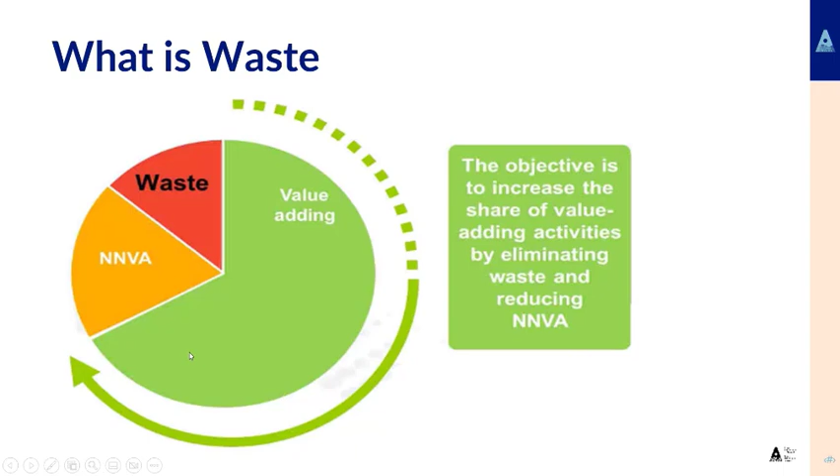So this non-value added, if it's excess checking and things like that, you can look at reducing that. And ideally, the philosophy here is to eliminate waste out of the process. But that's the philosophy, seeking perfection from lean. Reality is something different, but you're looking to minimize, reduce or eliminate it altogether, and reduce this by creating and maximizing value added activities.

So the acronym TIM WOODS basically takes waste and divides it into 8 categories. Anything that doesn't add value or is classified as non-value added activity is classified as a waste. And that waste can fit into 8 categories: transportation, inventory, motion, waiting, overproduction, overprocessing, defects, and skill under usage. Each one of these wastes we can see on a daily basis. So to give an example, we'll go through each one of them.

So transport, excess movement of information and materials from place to place. Examples would be on site, needless movement of materials. Materials coming in on site, being stacked in one location, then found to be in the wrong location for an activity 2 weeks later, having to be moved and then moved again to the location where it's actually going to be used in 6 weeks' time. So that's a perfect example of a potential waste.

In the office, poor location of the printer, so constantly transporting, moving up and down to where the printers were. For example, I worked in an office and the printers were on the 3rd floor. I sat on the 6th floor, up and down the stairs to check paper, which was a waste.

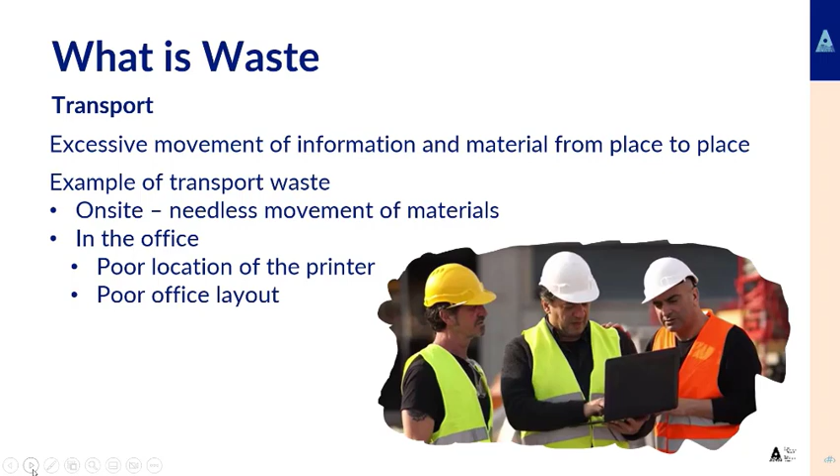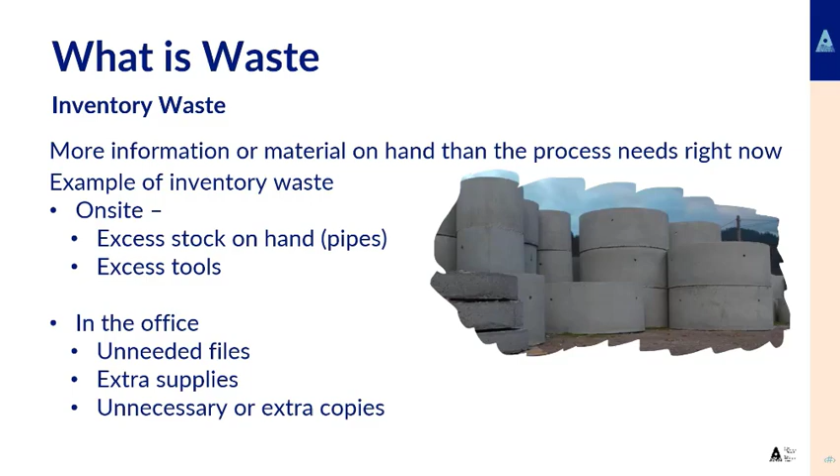An example in the office is unneeded files, extra supplies, having a pallet or 2 pallets of paper for the whole year taking up a room. That is classified as a waste from the inventory perspective.

Motion, you're thinking, oh, it's very similar to transport. Motion is any motion that is not necessary to the successful completion of the activity. So excess handling of materials, maybe moving materials 3 or 4 times around site, or putting them into one room and then realising the floors are going to be done in that room next week, then taking it all out and putting it someplace else, and that has to be moved again because you've got too much of it. So that would be waste of motion.

Excess walking to site, or walking around activities without having the information and walking up and down to find information, would be classified as excess motion.

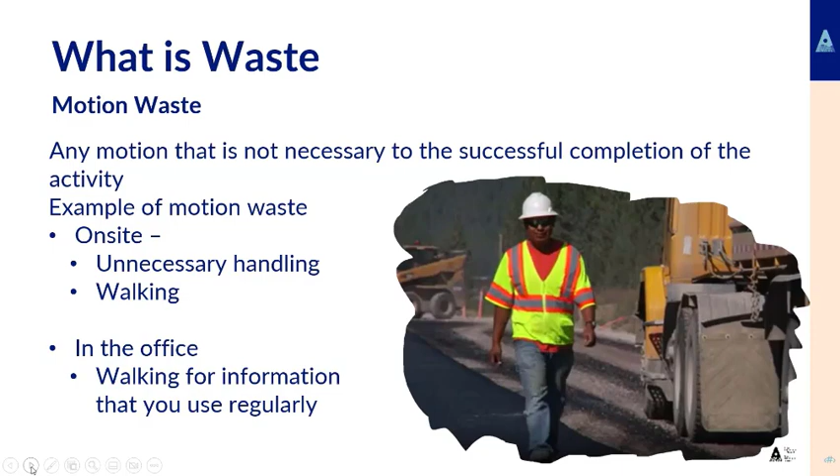In the office, so walking for information that you regularly use. Or if you're regularly working with a colleague on a project, that colleague's on a different floor or at the far end of the office, and you're regularly up and down talking, that whole example would be an example of waste.

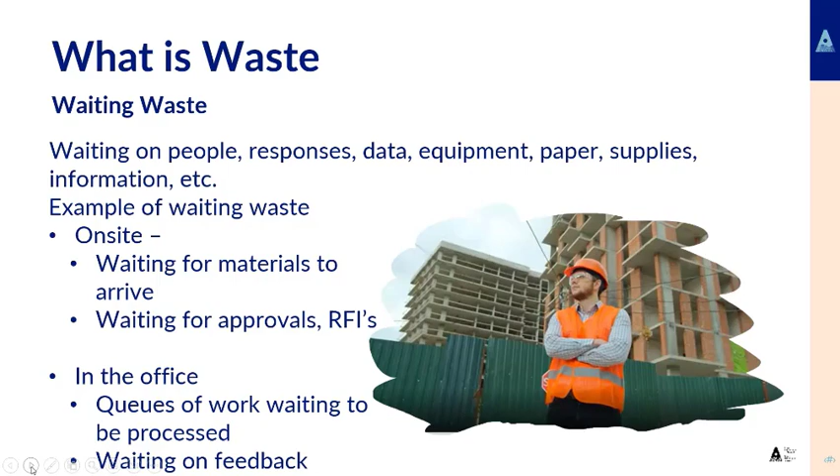Waiting is fairly self-explanatory. This one, waiting for people, responses, data, equipment, paper, supplies. So waiting, example, on site, waiting for materials to be delivered, waiting for approvals, for requests for further information, responses back. In the office, queues of work or waiting on processes or waiting for feedback from the client are all elements. Anytime you're basically waiting for a response, that is a waste.

So we're looking at another waste, overproduction. So producing too much or producing it before it is required for the next process. So producing it too soon or producing too much of the material, full stop, is a waste. So example, if you're fixing steel cages and the team goes on and fixes 8 steel cages and realises they've used material up that should be someplace else and they only need 6 and they've made 8. So that'd be overproduction.

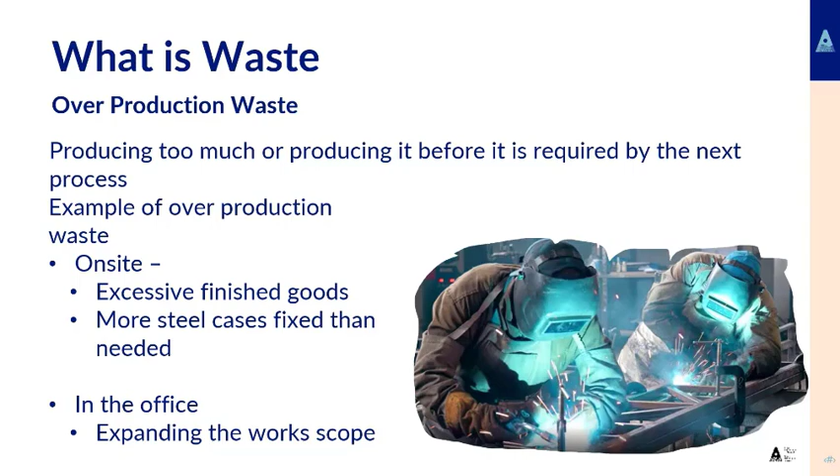So excess finished goods, more steel cages fixed than is needed. In the office, expansion of the work scope. So basically developing the work scope and going outside the scope, doing more work than is required.

Over processing is slightly different. So overproduction is actually producing it. Over processing is providing or creating more than the customer wants or is willing to pay. So if you're looking at specification, material finishes, giving a concrete slab a higher specification finish than what the specification details you is classified as waste. So you'll put more time and effort into finishing that concrete slab than what the actual spec is asking for and what the client is willing to pay for. So that's an example of a waste.

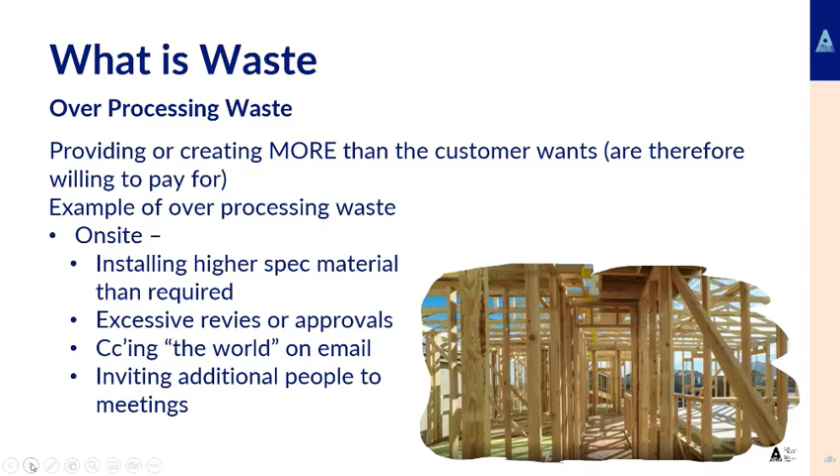In this case, picture here, probably putting in more timber columns than what's required by the structural engineer. Excess approvals going through is also a waste. So looking at approvals, example, CCing a lot of people into emails that don't need to be there. That's over processing, and then inviting too many people to meetings, people invited to meetings that don't actually have any impact or contribution to the meeting is another waste.

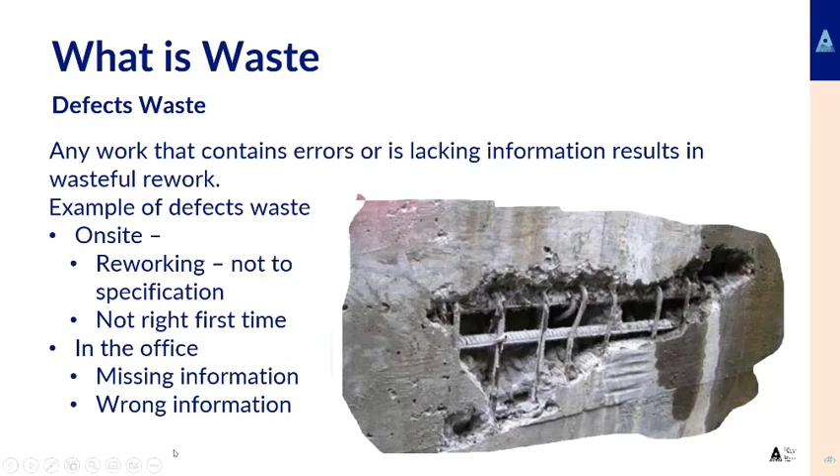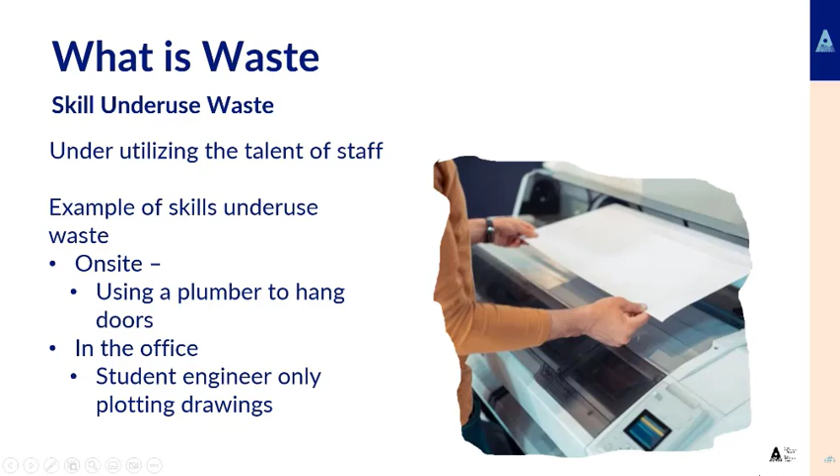So if you're looking at the 8 wastes, as I mentioned, the TIM WOODS 8 wastes, waste can be categorized into one of the 8 categories we've just gone through. So it's important we put them into the categories, so then we know how we can actually try to reduce and eliminate them going forward.